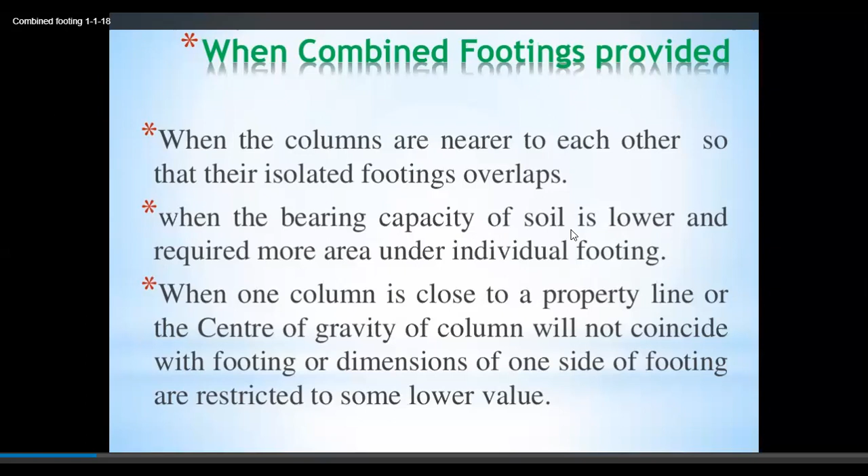Okay, based on the connectivity. On the basis of connectivity, there are different types of combined footing. First type is the slab type combined footing. Second is the slab beam type combined footing, and third one is the strap beam type combined footing.

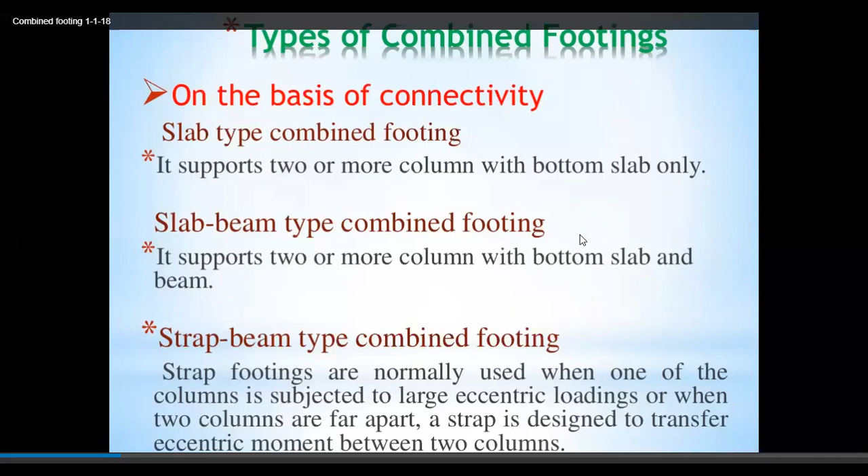On the basis of connectivity. Write down slab type combined footing. First, it supports two or more columns with bottom slab only.

Below this, write down slab beam type combined footing. It supports two or more columns with bottom slab and the beam.

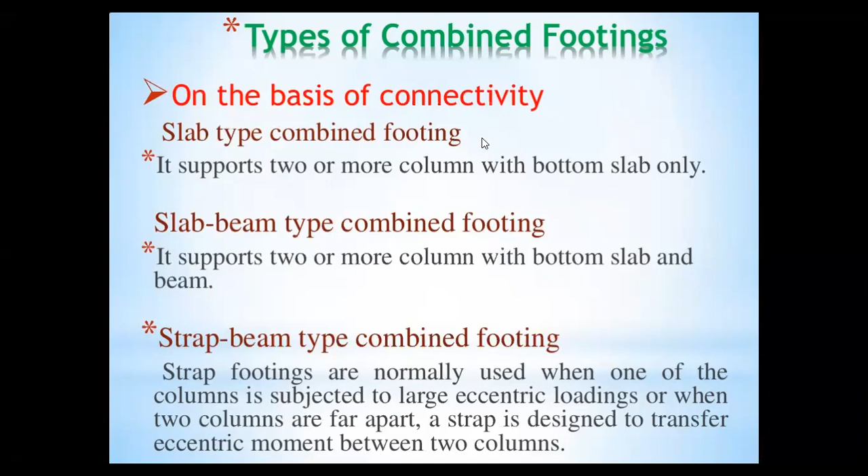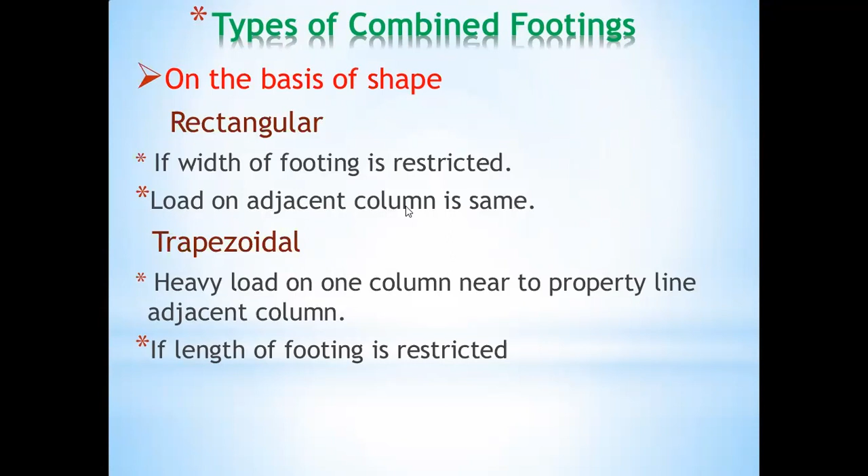Okay, we'll move towards the next slide now. Data required for the design. We have seen the types of the footings. Again, the second part, based on the shape of the footing, that part also we have completed. What is the foundation? What are the types of the foundation, that is, the footings?

Okay. After that, now we will move towards the design of the combined footing. For this design, we discuss here the data required for the design. First one is the size of the column that we should know. In the G+1 building, we have already calculated the design of the building. You can directly take the new dimensions, and based on this you can calculate the stresses, bending moments, and the steel reinforcement for the combined type of footings.

So first is the size of column, that is the width into depth. The depth and width of the column we should know. Based on this, the next point is the load on each column. Whether a trapezoidal footing or a rectangular footing is there, we should know the load on each column, column number 1 and column number 2. That is WA and WB.

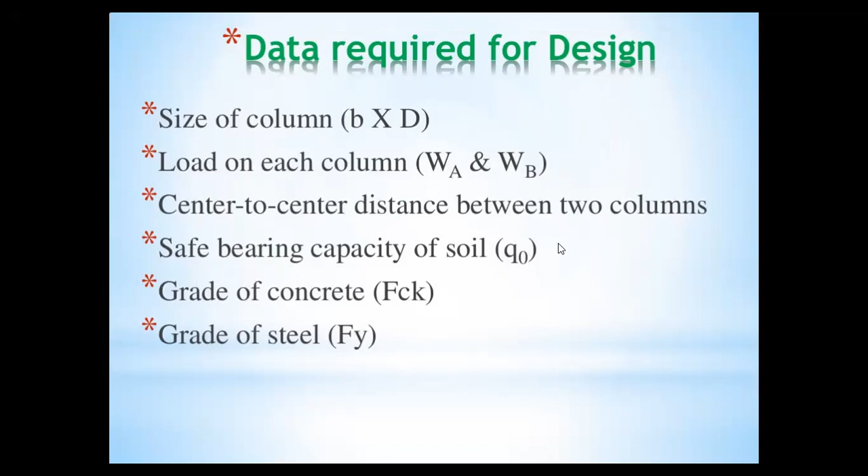Next slide. Design steps. Write down the design steps. First step is to design the size of the combined footing. We have to determine the size of the combined footing, B into D. Whatever the depth and width of the footing, we have to calculate that first. That is design step number 1: design the size of the combined footing.

Next, determine the moment and the shear in various sections of the footing. Here, SFD and BMD: whenever two columns are there, one beam is there, and based on this we have to calculate the shear force and the bending moment. Next, check the D for the punching shear and the direct shear, one way shear or two way shear.

त्या ठिकाणी दोन punching shear त्या ठिकाणी असतील तर ते जी डेप्थ आहे D that we have selected, that D we have to check for the direct shear and the punching shear. त्यामध्ये आपल्याला काय करायचं, we have to analyze, we have to check the depth of the footing.

Next one is, we'll go for the longitudinal and the transverse reinforcement. जे काय transverse आणि longitudinal reinforcement आहे by using the AST formula. AST formula 0.5 fck bd upon fy of 1 minus, जो काय तुमचा फॉर्म्युला आहे, that formula we can use for the longitudinal reinforcement, that is for the AST in longitudinal reinforcement and AST in the transverse reinforcement, that we have to calculate over here.

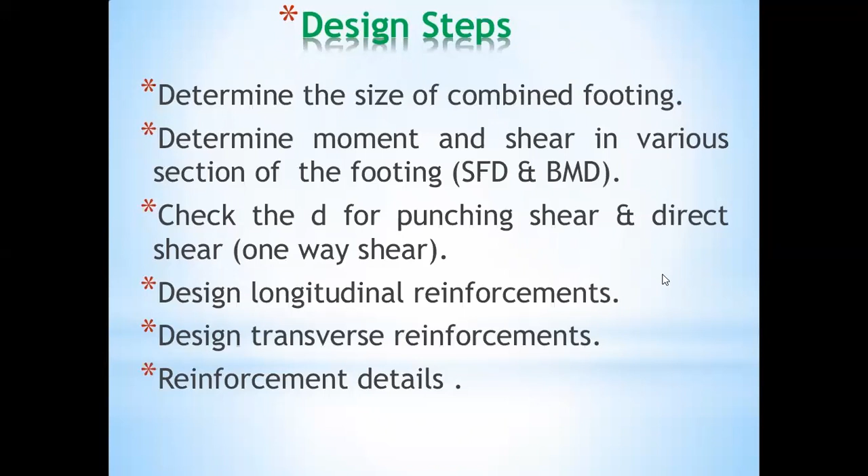Again, we have to calculate the AST, that is the distribution steel and the main steel for the transverse reinforcement of the footing and the longitudinal reinforcement of the footing. And after that, we have to draw the reinforcement details with the cross section of the footing. These are all the steps in the design of footing. Next, we'll move towards the first point, that is the size of footing.

तर बघा, first size of footing, how to calculate or how to determine the size of footing. तर बघा, area of footing is calculated as total working load on the column plus self weight of the footing, which is considered 10% of the total load on column, divided by safe bearing capacity of the soil.